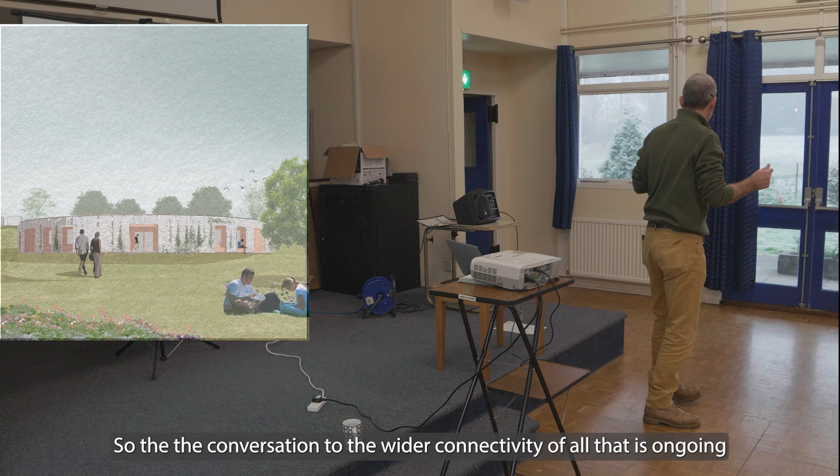First thing is, given the site that we've got, this design at the moment is only in the fenced area. So the conversation to the wider connectivity of all that is ongoing, and obviously some of your comments are going to help foster a good dialogue with that, with Dacorum. So in regards to access, in regards to where the car parks stop or start, where the servicing is, all those sorts of things, we're trying to get everything in the pot so that we can work out what the best solution is.

Okay, so the second thing is in terms of a brief, there's two briefs. One is a functional brief, as in what's required. Connected to that is how much is it going to cost and how's it going to work? That's a physical thing. The main thing, though, is there needs to be a social brief, because why are we doing this? It's a social centre, it's a community centre.

And what we're trying to do is make something that celebrates Tring, celebrates the best of Tring, now, in 50 years' time, and in 100 years' time. So we're leaving a legacy to people for 100 years' time. They'll say, this is how they did things, this is what they did, and this is what they gave us. And that's an important thing.

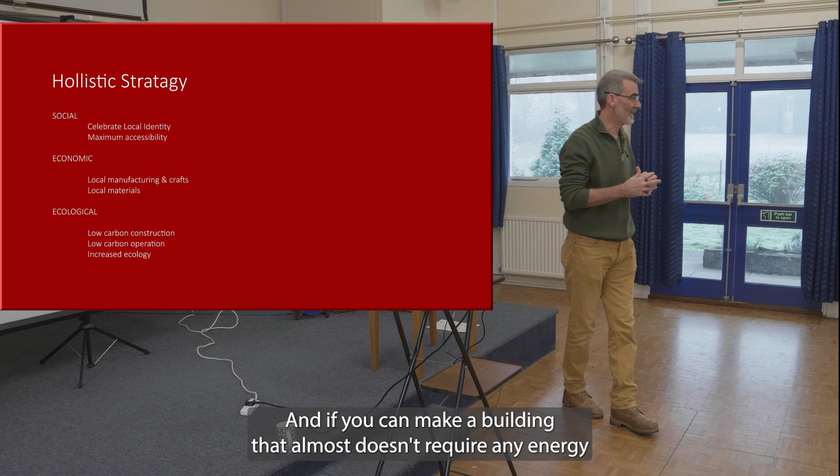When we build into this project the fact that we've got climate change, we've got oil prices, we've got all sorts of things, it's not going to get better, it's getting worse. So what we have to do is find a way of making the building future-proofed in terms of its operational energy requirements, fundamental. And if you can make a building that almost doesn't require any energy from the grid, that's a great legacy to leave people, because it means they can operate the building without being burdened with other costs and the risk of things closing down.

So secondly, social and community. It needs to be inclusive. It needs to be something for everybody. Symbolically, circles have no corners, so there's no inside, there's no outside. It's just a sort of corral for people to come in from all directions. That's just a symbolic thing. And many cultures throughout the world, when they do community things, it's a round thing.

Secondly, from a practical point of view, one level. I know a lot of you have been asking, why is it on two levels? And we have to ask the question, why would it be on two levels? What's the benefit of two levels? The downside of two levels, I mean, you'd have a more compact construction possibly, using the same foundations to do two floors, but you have to realize you're giving up a lot of net internal space.

Because in order to get access for everybody to the second floor, you need to have circulation space, you might need to have toilets, and you certainly need to have a lift and staircases. So you're taking the net area that could be used from the budget that we may be able to put into that, which is not something that's going to contribute to the functioning of the programs that you're going to be running.

And then the third thing is, if we're going to do something like this, this is at the heart of Tring Town, and it needs to be something that we're all proud of, celebrates the best of Tring. That means, is it possible to build with our local craftsmen? Is it possible to build with local materials? And is it possible to have something that shows how you can run a building with very little cost? And if that's all possible and it looks great and everyone's proud of it and it works very well, it's the sort of thing that other people in other towns might say, that's a good idea, maybe we could have one of those. Let's learn from that. So I think there's something there in terms of the legacy of that.

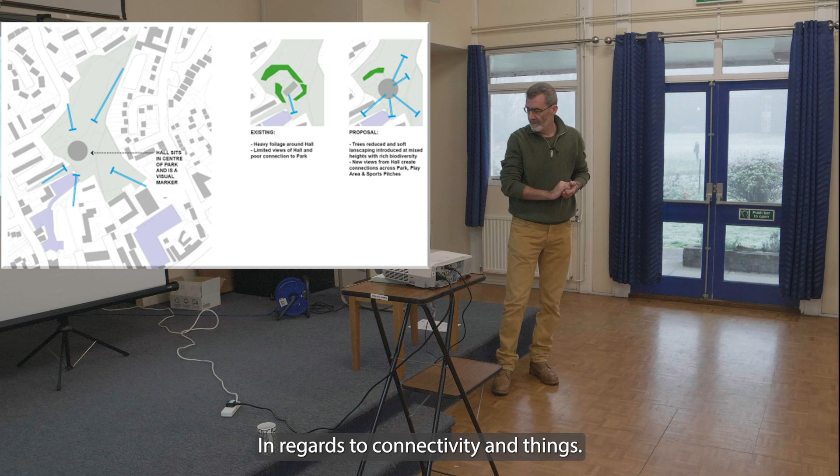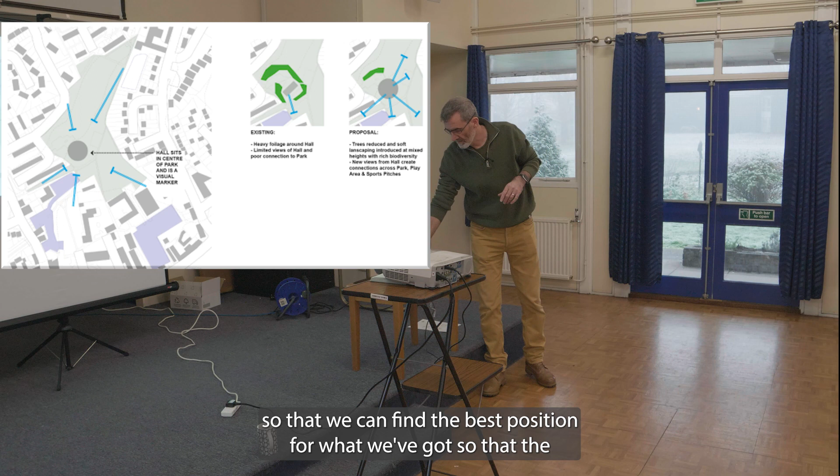In regards to connectivity, I'm not going to go too much into this, but you're all local, so you're aware how the whole thing works here. Basically there are various routes - primary routes, secondary routes, and nodes, where someone will hang around because there's something going on, a playground for instance. We need to analyze and map those out so we can find the best position for what we've got, so that the opportunity here can be a catalyst for the wider area, not just something on its site that doesn't pay attention further afield.

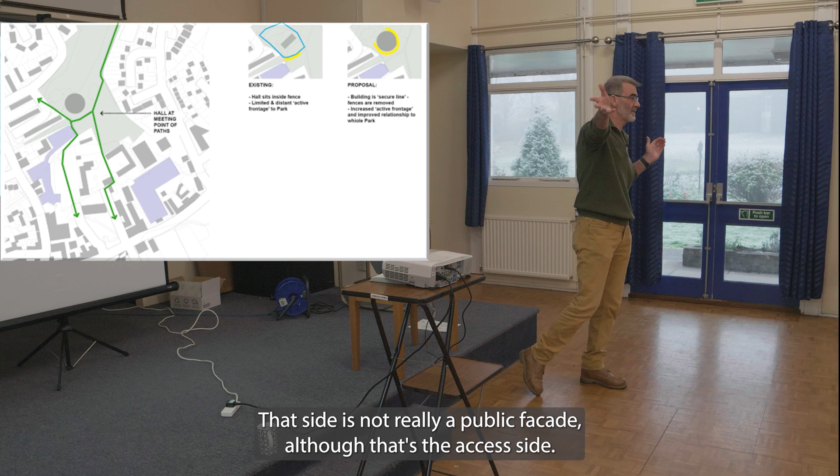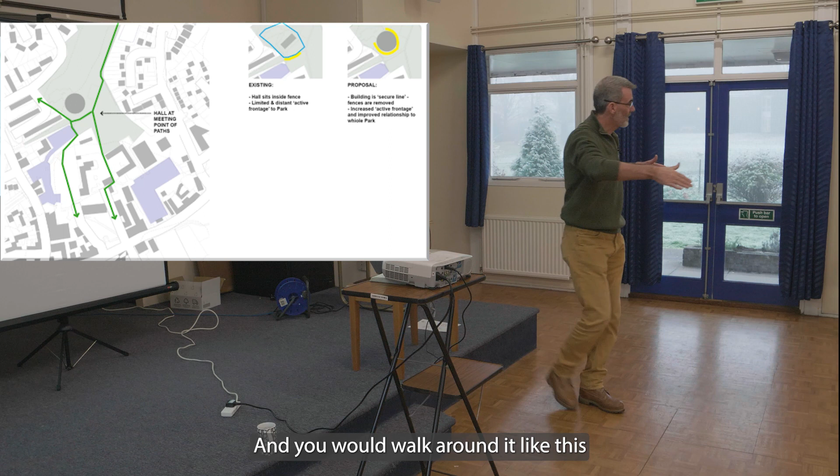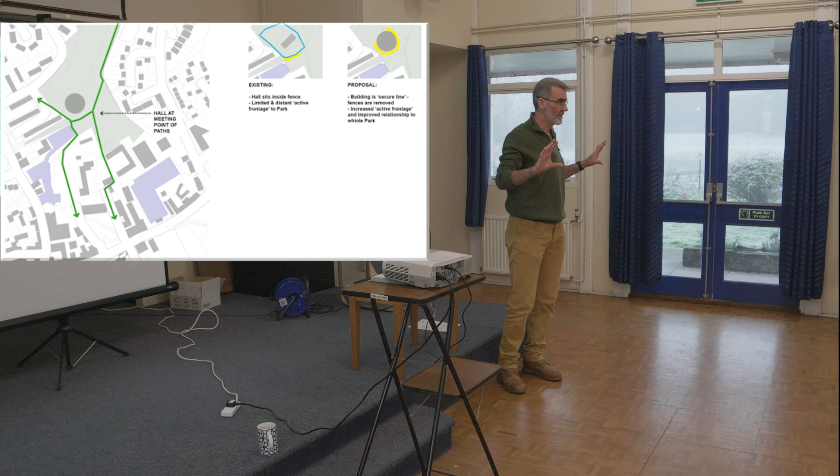At the moment, this whole building has a facade on this side. That side's not really a public facade, although it's the access side - great that we've got lots of light, but in terms of public identity, this is it, that's your shop window. By doing a curved circle that goes further out, the front of the building would probably be halfway between here and the fence, so it's much more in the park, and you'd walk around it as you pass through. So the public facade, the shop window of this space, is far more exposed, which should encourage people to use it - it would have its own identity.

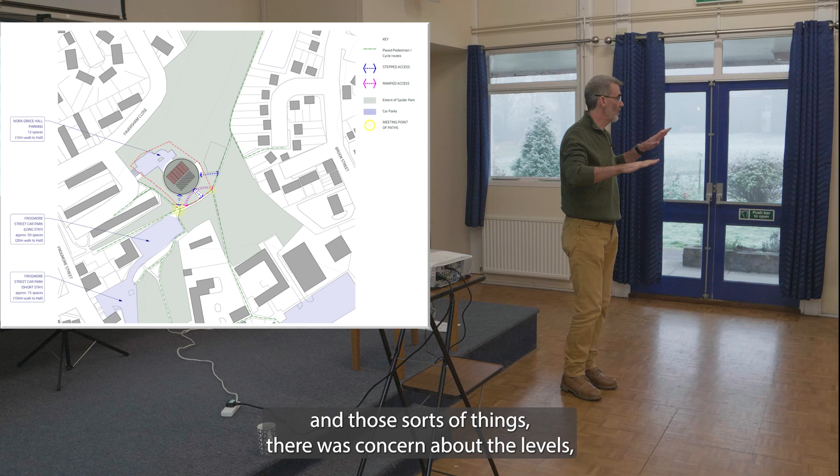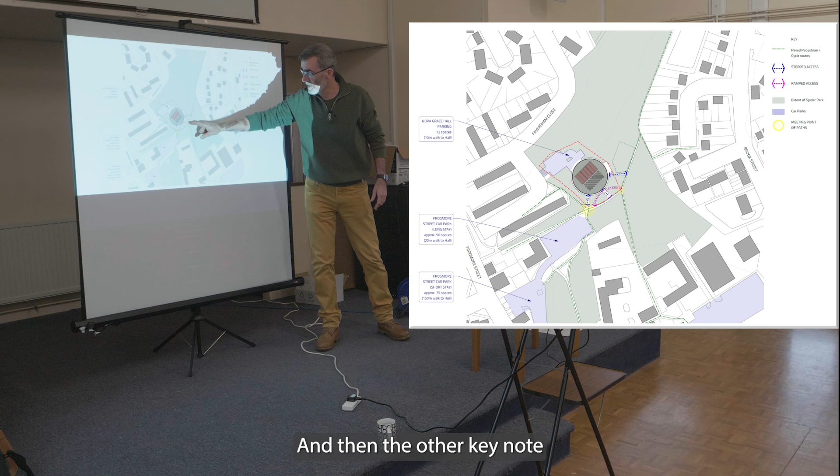In regards to circulation, I won't dwell on this too much, but just to clarify from the last consultation, in terms of access for partially abled people or pushchairs, there was concern about the levels. Actually, you can see - I'll go up here - the key nodes are on the corner of the park, unless the parking changes, and the other key node is where you get the connectivity. The front of the building is facing that way, oriented this way.

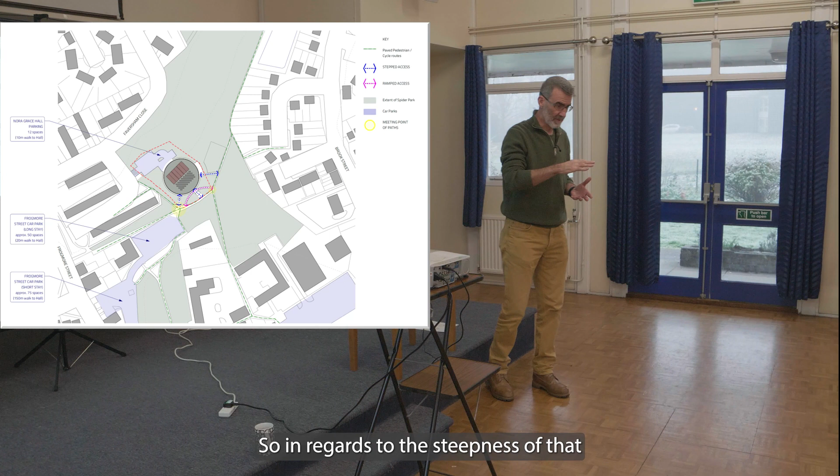But it's probably not the route most people will access the front door through, because you'd be coming from there or there. So you'd gradually climb up the ramped area, which goes either side - a gentle ramp that gets you to the front door and back down. So regarding the steepness and accessibility, it's a balance between that level and where's the best place to put the floor level.

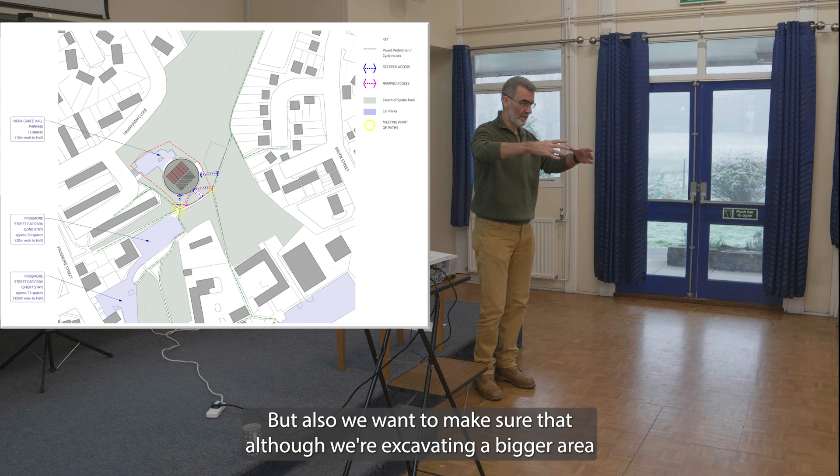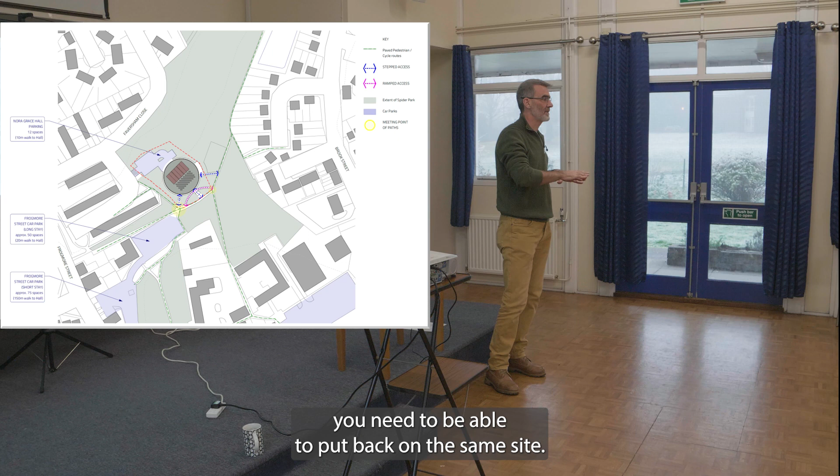At the moment, the balance is that the floor level we've designed is slightly higher than this, to try and reduce the slopes, to make sure we can still have access. We also want to make sure that although we're excavating a bigger area than the footprint, we need a balanced cut and fill - whatever you're cutting from the ground, you need to put back on the same site. What we don't want is lots of lorries going away with all sorts of muck.

So we talked about that before. Just basic community is we're all together. There's no hierarchy in terms of its formal position.

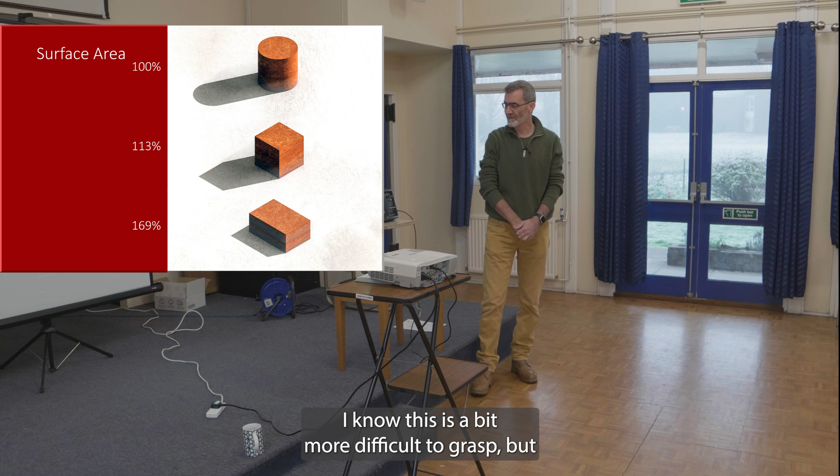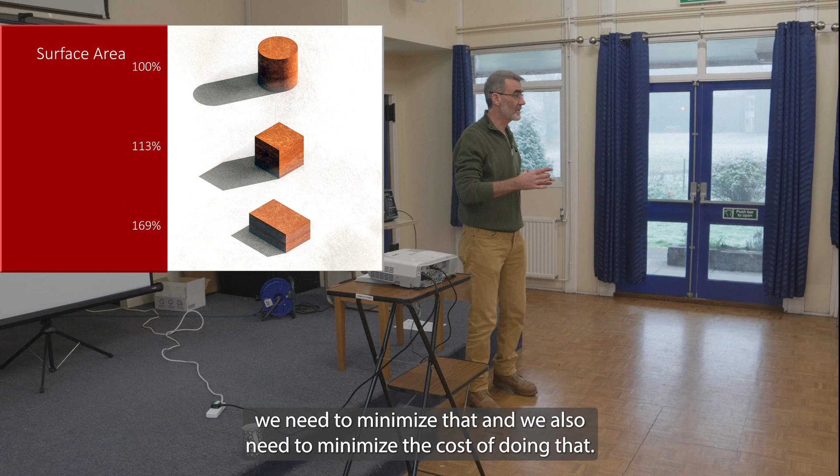So we'll come on to this now. I know this is a bit more difficult to grasp, and I know there's engineers in the audience here, maybe you can explain the maths to some other people as well to help them. But basically, given that the brief is to make a low carbon building, in terms of the amount of carbon that's used to construct the building, but also in terms of the carbon used to run the building for the next, say, 100 years, we need to minimize that. And we also need to minimize the cost of doing that. Is it possible to do all of that at the same time as having a building that celebrates and is something that we can get excited about? That's the balance we have to have.

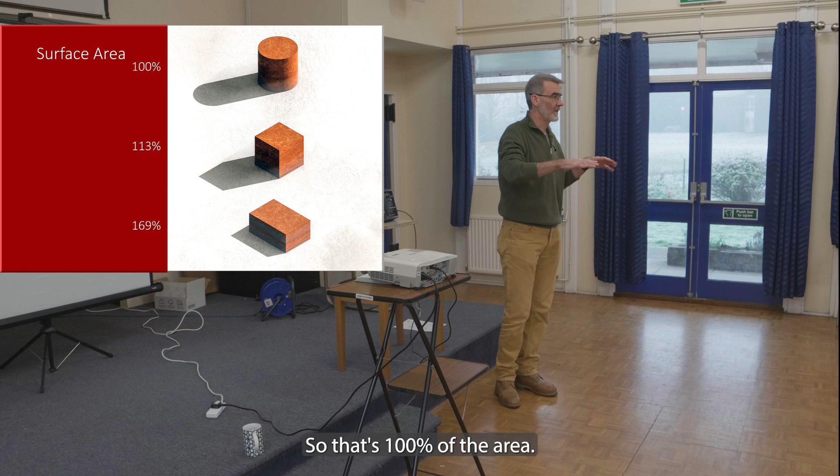So if we take an area, let's just say we have 100 square feet and we have to make a building, and we're going to make that building round. So that's 100% of the area. Now, if we make it square, the external surface area of the same floor area is now 13% more. That's not too bad. But if we make it rectangular, which most buildings are, this building is, lots of buildings are rectangular - everyone feels they want a rectangular building because they can have views both sides, easy access both sides, lights, all those sorts of things - we've gone up to 69% more.

So if we just look at that as an economic issue, and there's going to be a limit on the amount of money that can be raised, the budget and what's being paid for, wouldn't it be better to put that 69% into something else that's useful for the community inside the building?

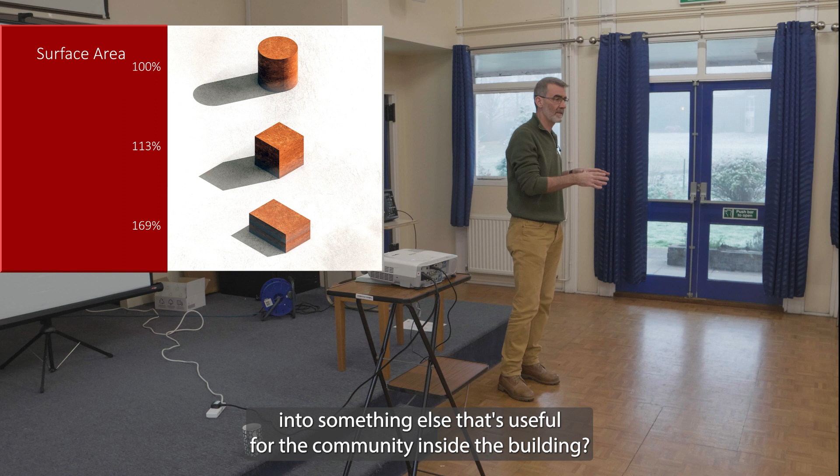Can I ask a question? I can see the advantages of a round building from the external building. But for storage and space usage within, it limits it.

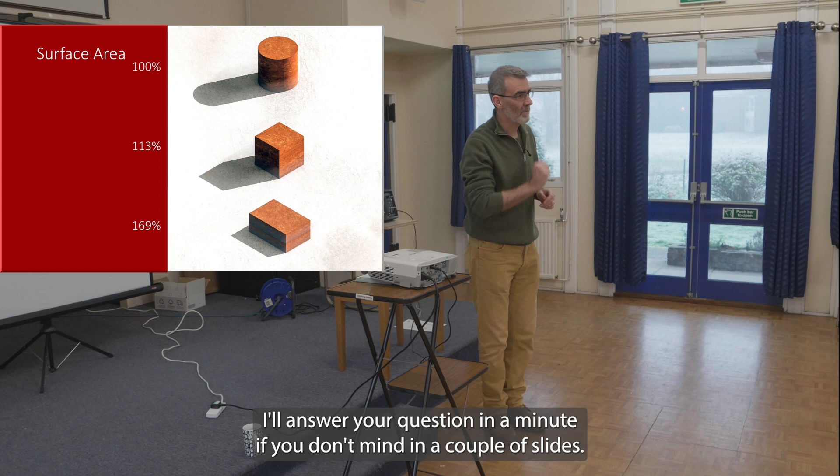I'll answer your question in a minute, if you don't mind, in a couple of slides.

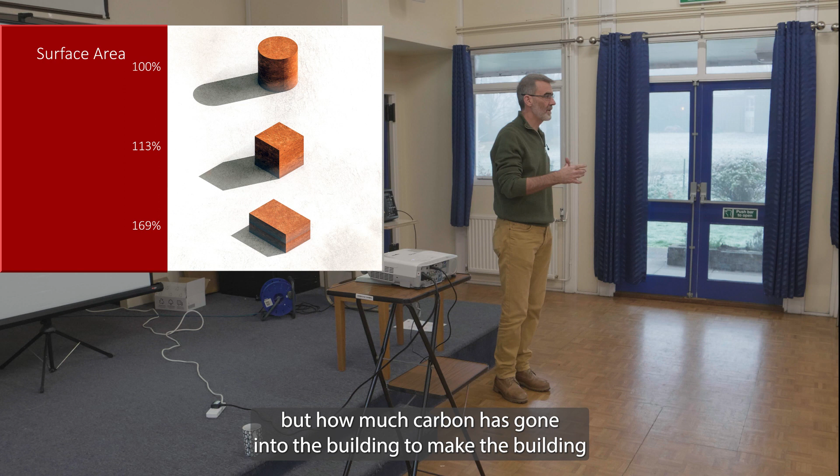Secondly, it's about the construction, in terms of not just the cost of the wall, but how much carbon has gone into the building to make the building. And if it could be 69% less, that's a good thing.

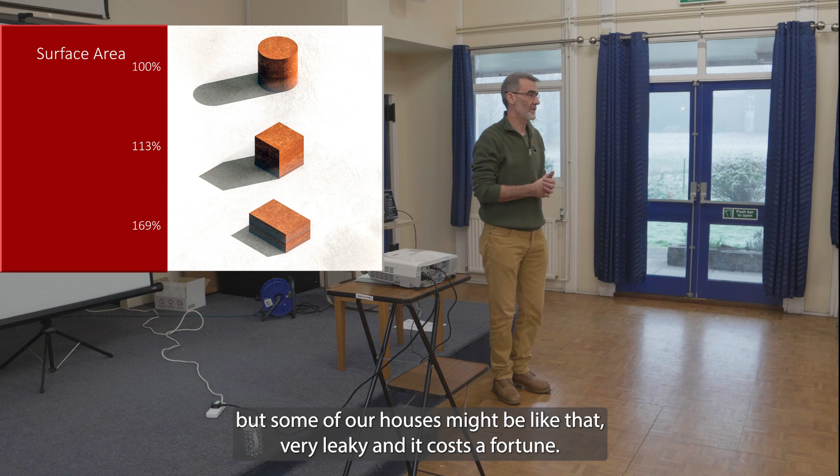And thirdly, the last one is through the external fabric of the building, that's where you get your heat loss. You all know about that. I mean, this building's appalling, I'm afraid, and I don't know what the running cost of it is, but some of our houses might be like that, very leaky and cost a fortune. So if our energy bills in our average homes have gone up to 3,000, 4,000, that's an awful lot.

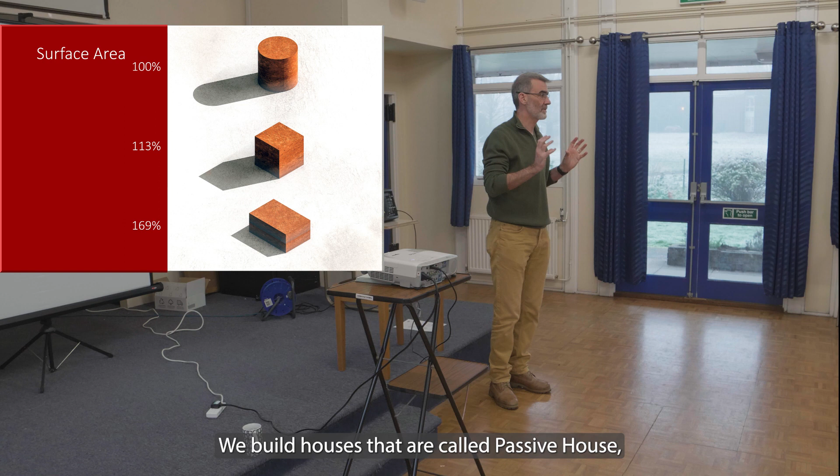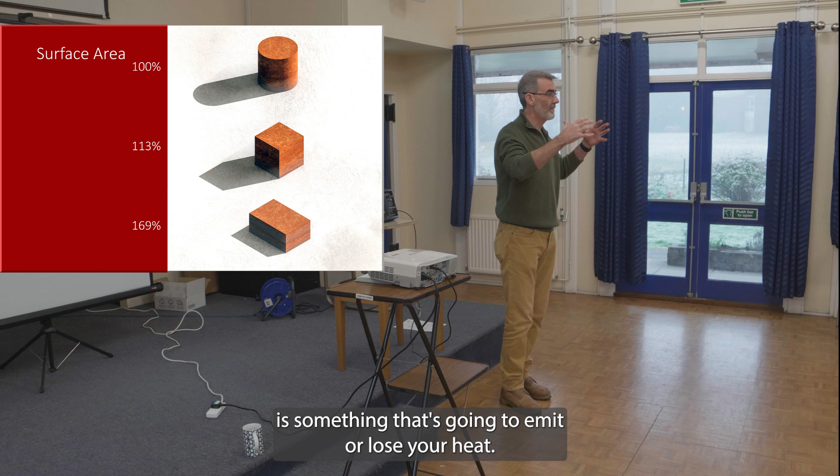Now, some of you may not know about them, but there's a thing called passive house. We build houses that are called passive house, and they are high standards of energy efficiency. If I build a 3-bedroom passive house down the road, your energy bills would be about £300 or £400, and that's a good thing, right? So we want this building to reflect that type of thing as well. So the surface area of the building is something that's going to emit or lose your heat.

And that means that if we can reduce that by 69%, that is a good thing as well. So we'll come back onto the question in a minute in terms of storage.

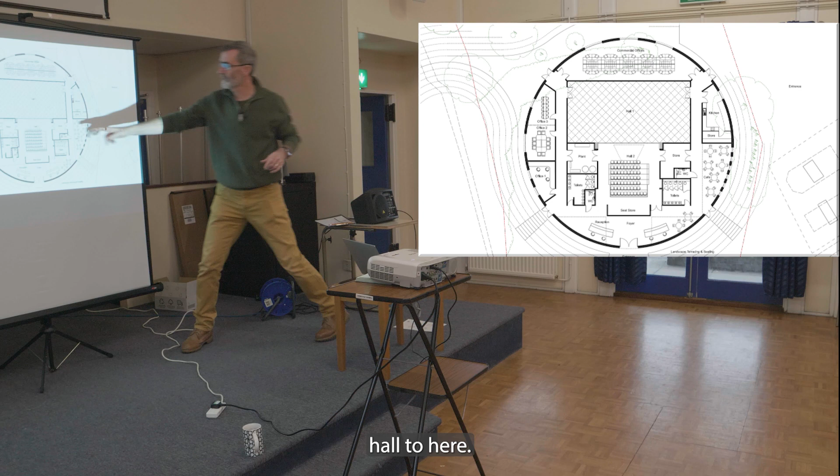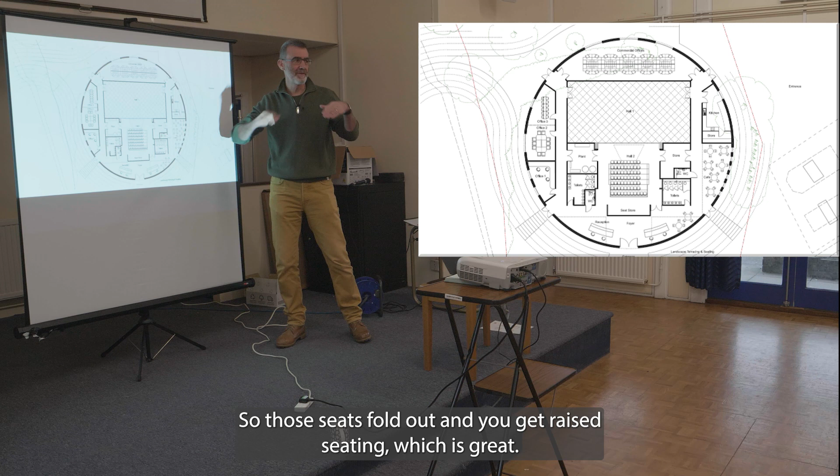So the layout at the moment is Hall 2 here. For the brief, we wanted to take these seats and make a cinema, so there could be a film club for those seats. I think there's about 75 to 80 seats. Those seats fold out and you get raked seating, which is great, and they've just been bought, so we want to make use of those.

So they're stored in here. When they're stored away, this hall functions as any other hall like this in the usual way, with whatever multifunctions go along with that. Now this hall doesn't have any light, specifically because of the kinds of functions you might want to run in those spaces.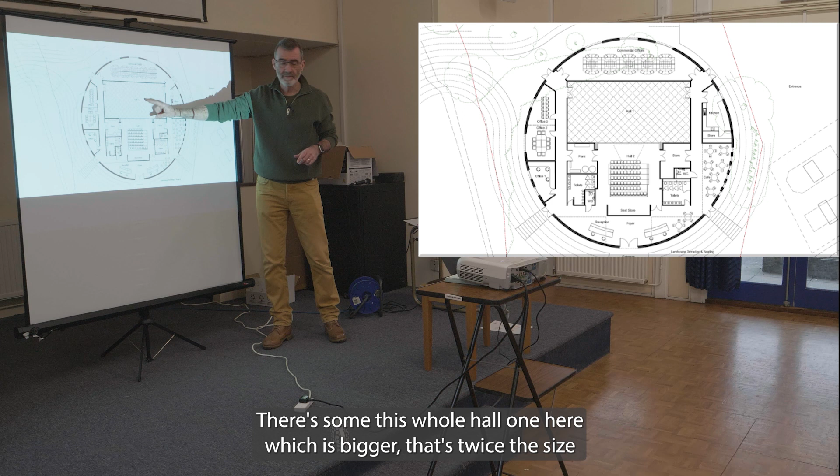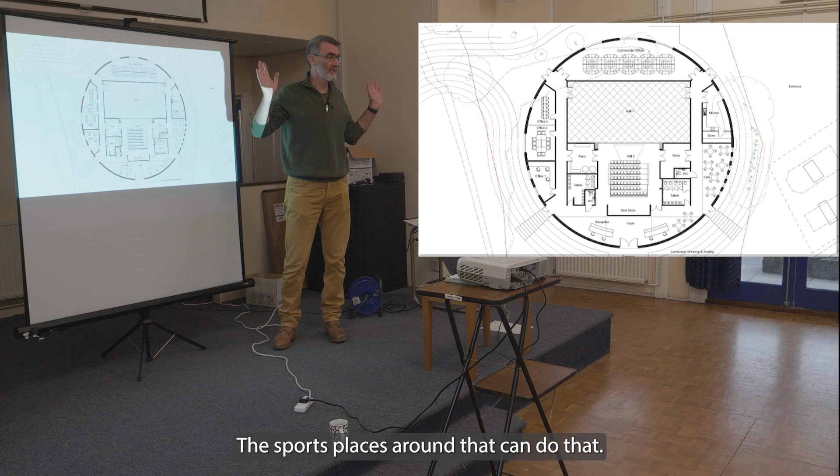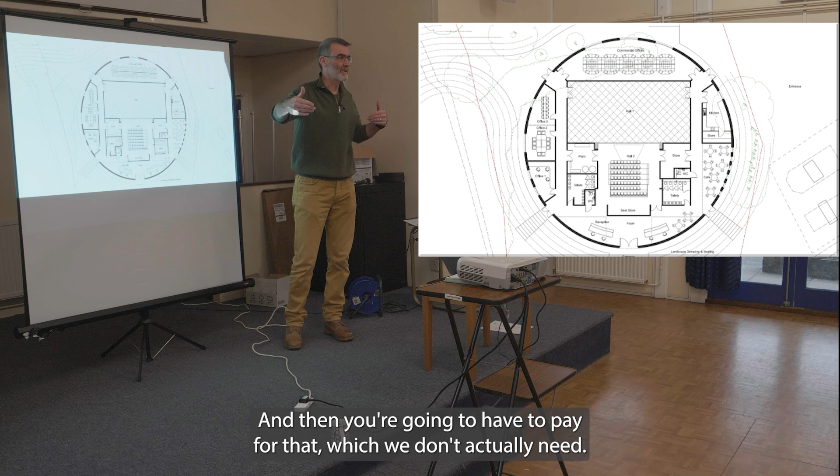There's Hall 1 here, which is bigger, twice the size, and that's a more flexible hall, higher, because you can get more things going on. This is not a hall for sports - there's sports places around that can do that. The trouble is sports like badminton have very specific requirements for volumes, heights and distances, and you'd have to pay for that, which we don't actually need. But it's versatile enough to do an awful lot of things.

And this hall is completely daylit. The little pitch roofs you see on the building all have windows, so there's an awful lot of light coming in on both sides. They can be blacked out as well, so if we need them dark, that can be done. If you want light in this room, you can open up these folding doors and you'll get a lot of light coming in through here too.

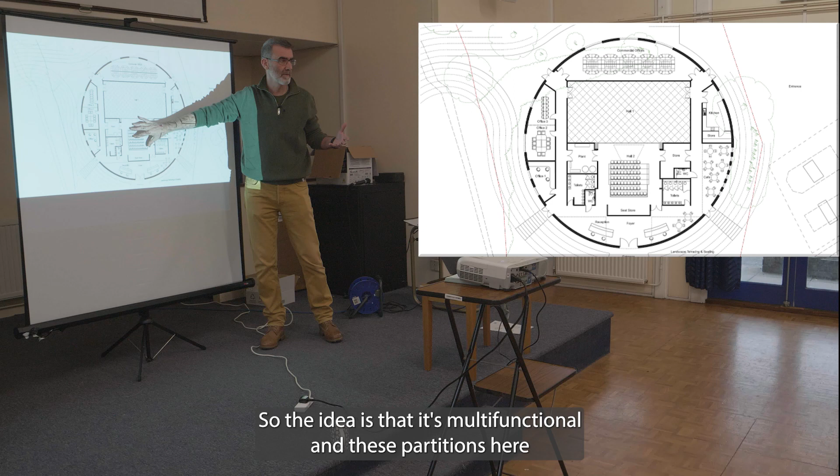So the idea is that it's multifunctional, and these partitions here are acoustic buffers as well, so you could have two functions going on at the same time. Now I'm not suggesting...

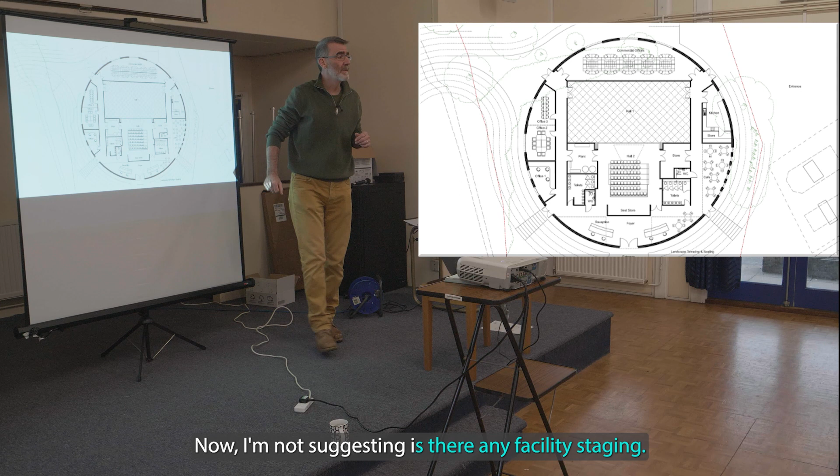Is there any facility for staging? Temporary staging - yeah, so just coming to that. Basically, with the acoustic buffer here, most functions that go on are probably going to work. But if you've got a disco going on here and you're trying to have a cinema here, no, that's not going to work. At that point, you start getting in a management system to make sure you're not programming things that aren't conducive to the way the building works.

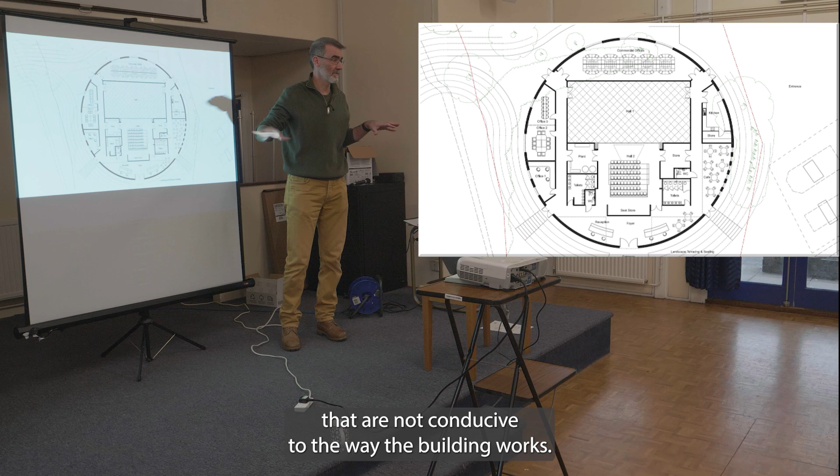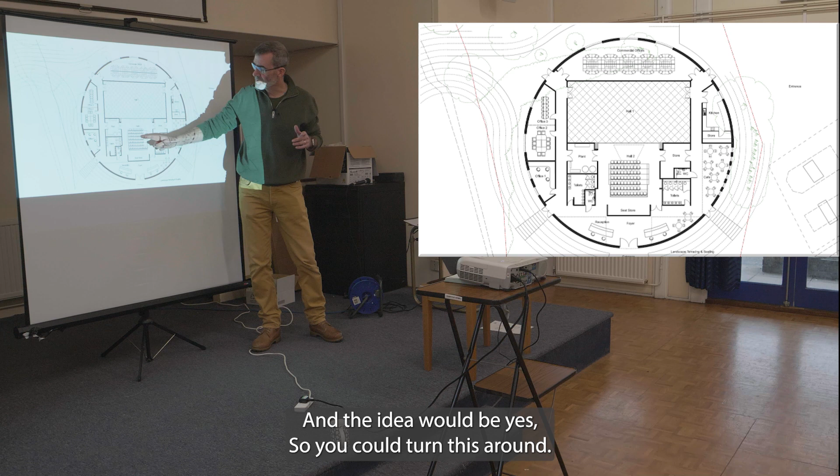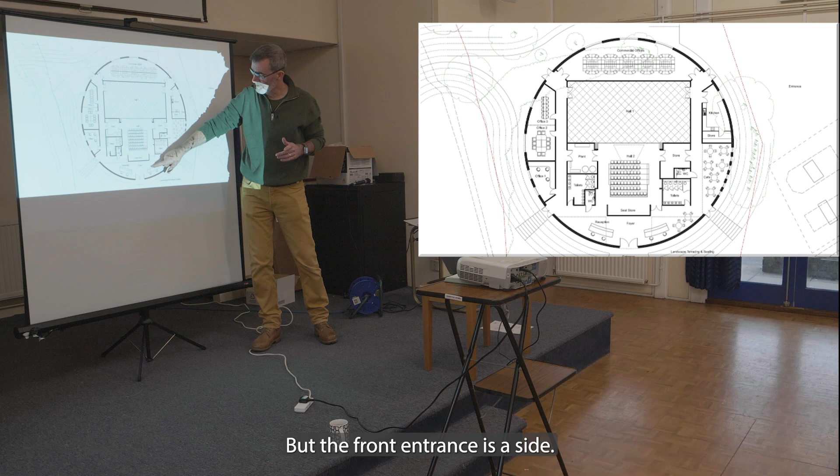So with this being around 80 seats, is it possible to say occasionally have a 200-seat performance? The idea would be yes - you could turn this around. Either you use this as rake seating and move this forward a bit, getting sight lines that go like that, with the stage here. Or you could reverse it and go this way, but the front entrance is on this side, so there are some things to think about how that best works.

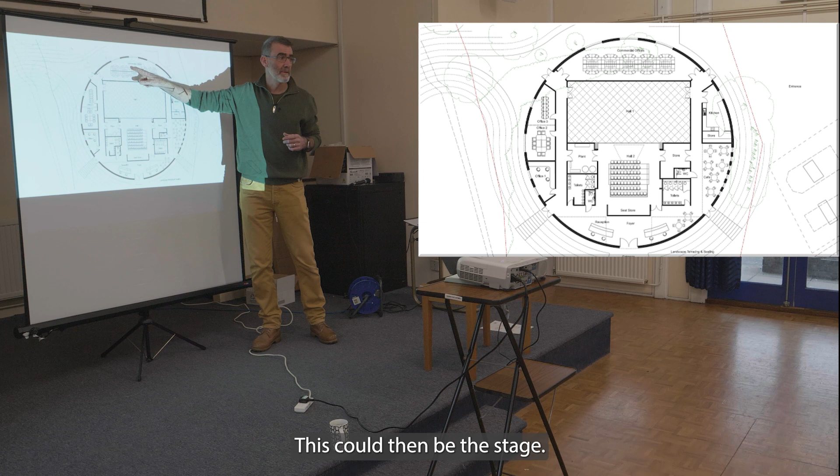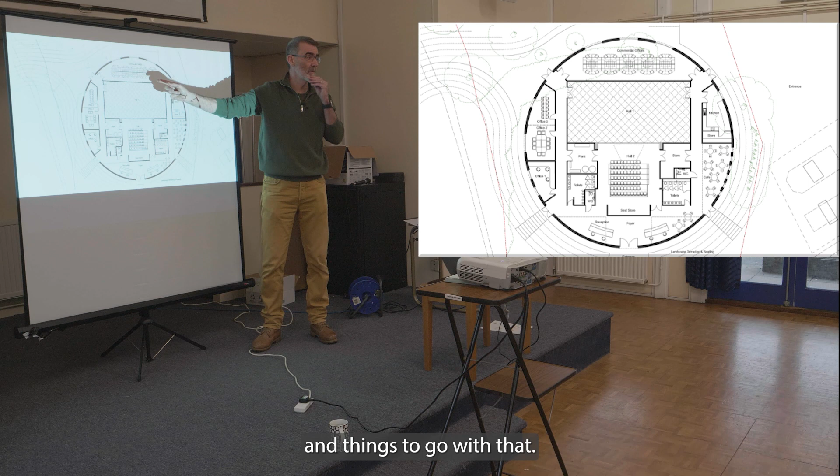Given the back here is for servicing - this is a slightly outdated plan, but each of these has its own door so we can get access in. We just thought of an idea: we could have similar screens here along here, so they could open up these partitions. This could then be the stage, and we can access stage sets, sound equipment, and all sorts of things from the back. You'd get a back of house, with a couple of green rooms and things to go with that. So there's all sorts of things that could be configured to balance how these spaces work.

So those are the main halls. Then we get toilets for that number of people - that's how many toilets you need. Plus we need storage, plus we need plant rooms and stuff like that. So that's the main building there to function. Now, in order to make that work, you have to have your fire escapes.

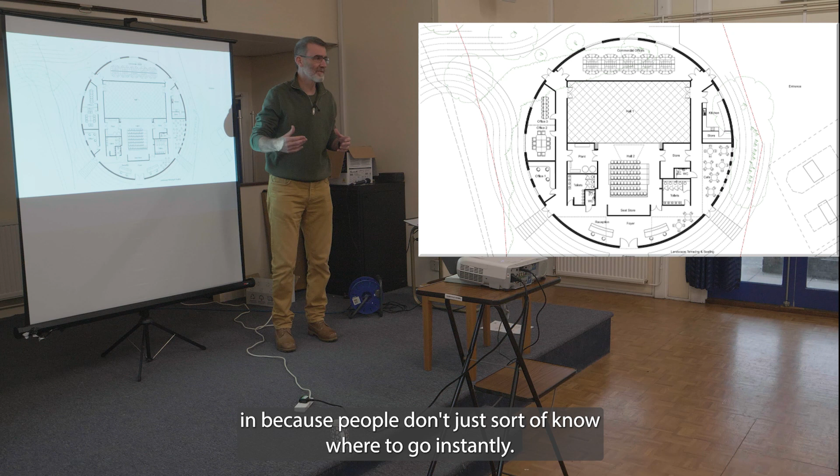You have to have access corridors for that many people, and you need to hold people before they go in, because people don't instantly know where to go. They're milling around, a bit lost. When everyone backs up like that, it's an issue. So you need net area to handle that.

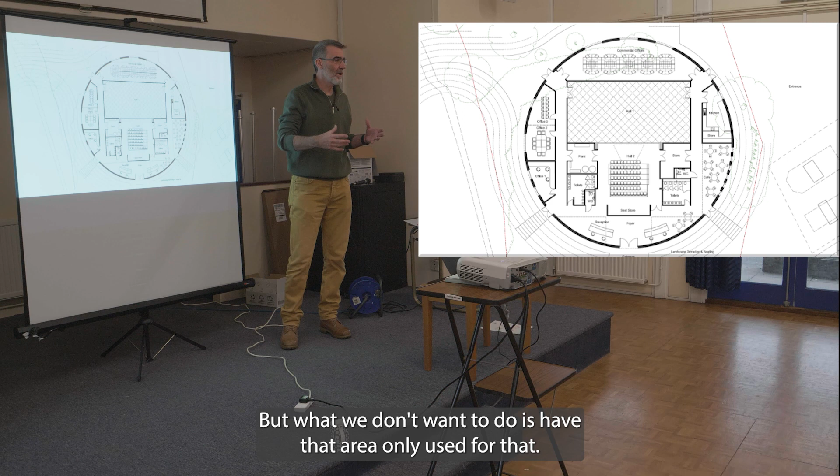But we don't want that net area only used for that purpose. It just doesn't make sense. It should be multiple use.

So we can have spill-out space here where we have the cafe. And the cafe is where the heart of the building is. It's the life of the building.

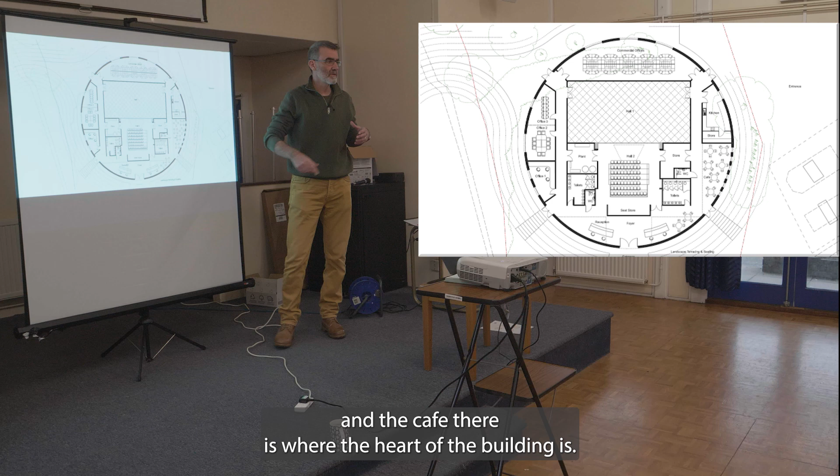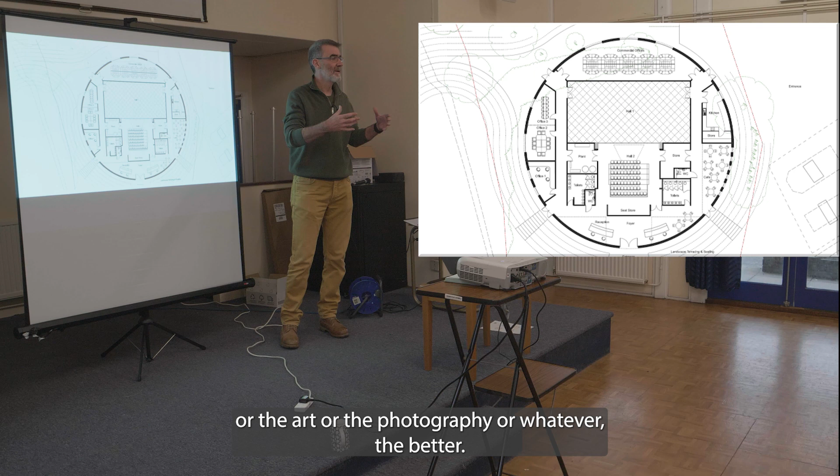When you have a particular performance, you can clear away stuff and make more space available for circulation. The walls of those spaces really should be used for exhibitions and things like that. Ideally exhibitions should be where people are going to be, so more people get exposed to the paintings, art, or photography - the better. We're making more use of those spaces as well.

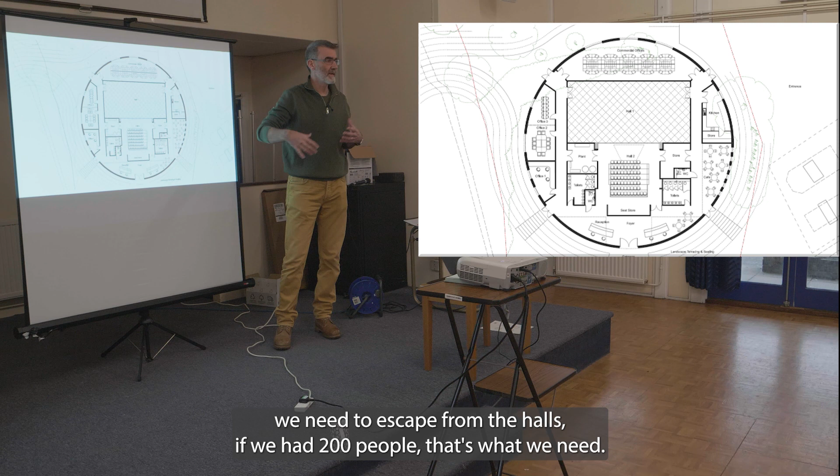You can see the corridors, technically, and the amount of space we need to escape from the halls - if we had 200 people, that's what we need. So we've got to make the area bigger.

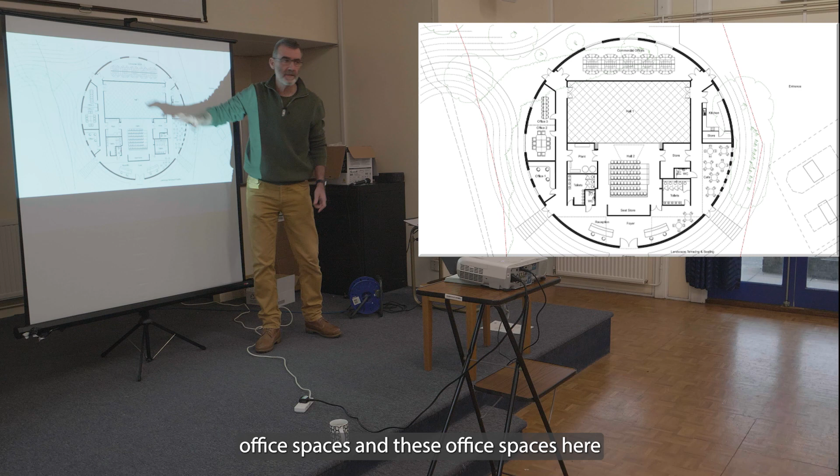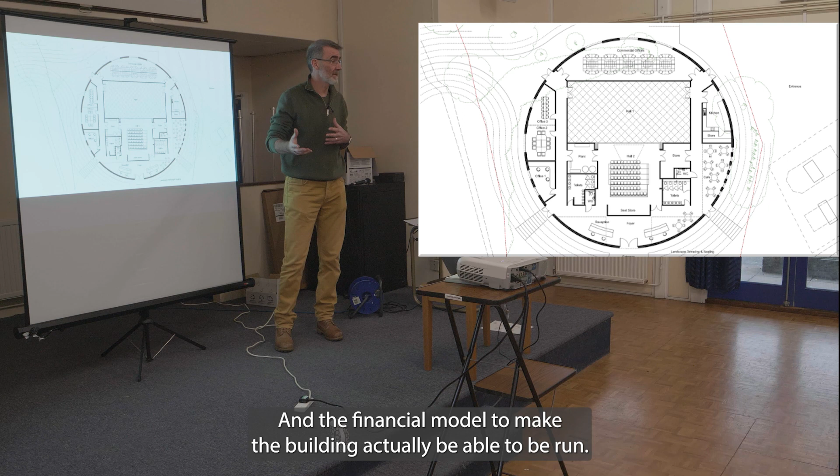Around the side you get these secondary office spaces, which are configurable to either be part of the hall - private, for management - or open to the public. The balance of how much is used for the public is about operating costs and the financial model to make the building actually able to run. That's a question to be navigated later.

So did I answer your question on stage set?

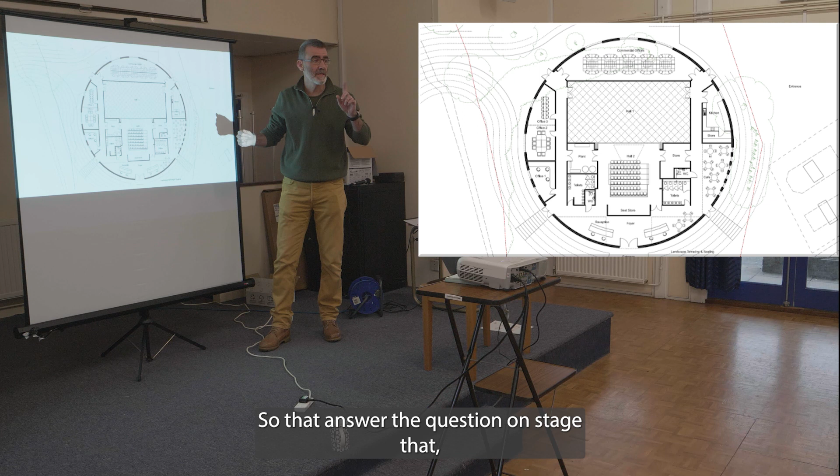Now, in terms of access, you can see we have fire accesses here, here, here, here, and also here. So that's where they need to be.

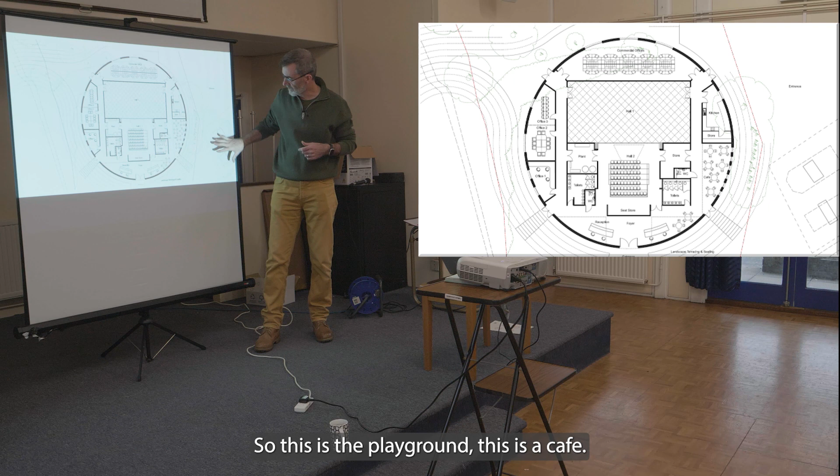It makes sense to make a fire access also an access point, since you've doubled it up. Depending on where you are - this is the playground, this is the cafe - it makes sense to use this just as a door.

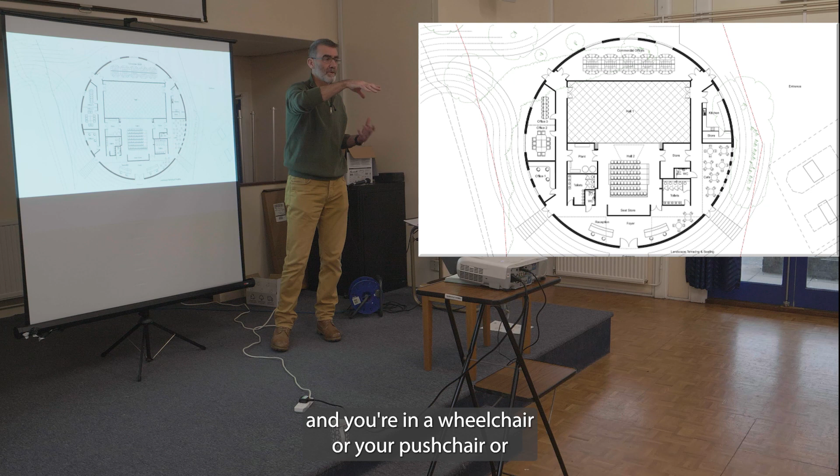Likewise on this side, if you're coming from the car park and up the ramp in a wheelchair or a pushchair, it makes sense to come through there. So there are multiple points, as well as through the back here for more private use of those spaces.

So that's the connectivity. Don't need to go on about that anymore.

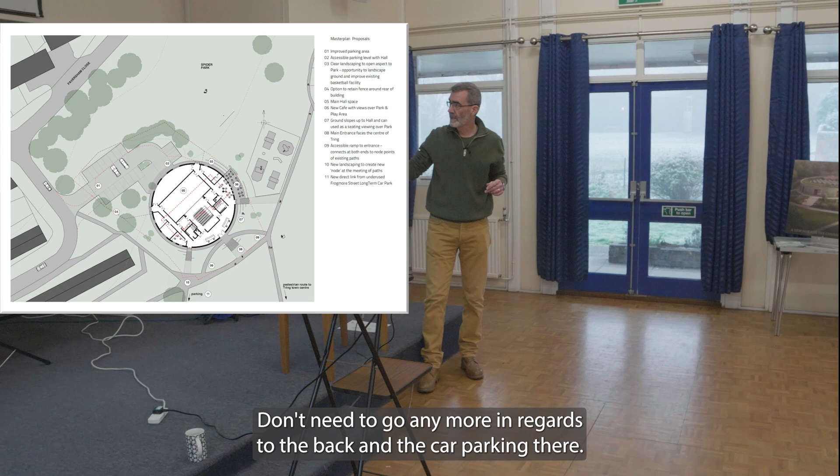Regarding the back and the car parking there, the slope is shallower than that because we moved the building up a bit, but that's something that needs to be worked through. At the moment you've got three or four disabled spaces right at the back, so you can actually get to the threshold of the building.

That's something to be worked out because we don't really want cars coming up the front of the building - you'll just get cars in front of that and it'll block everything else. That path from each of those nodes is just a gentle ramp.

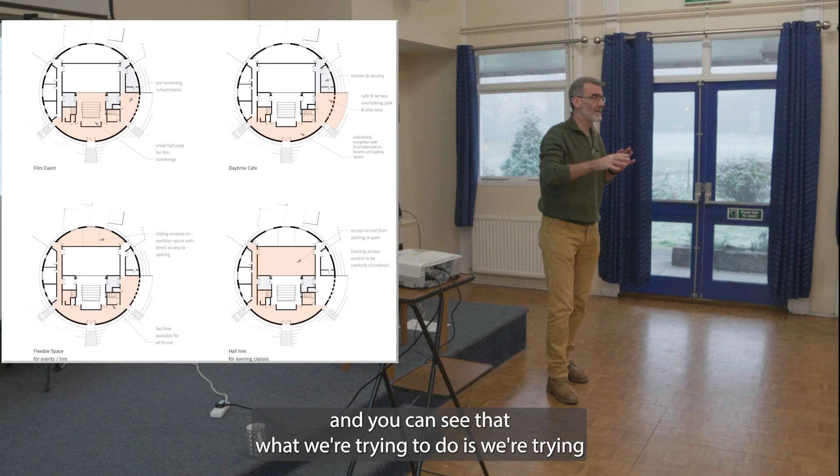I'm not going to go into this, but you can look at the diagrams there - we're trying to analyze and anticipate different types of programs, different types of use, and work out how the building would be configured to do that.

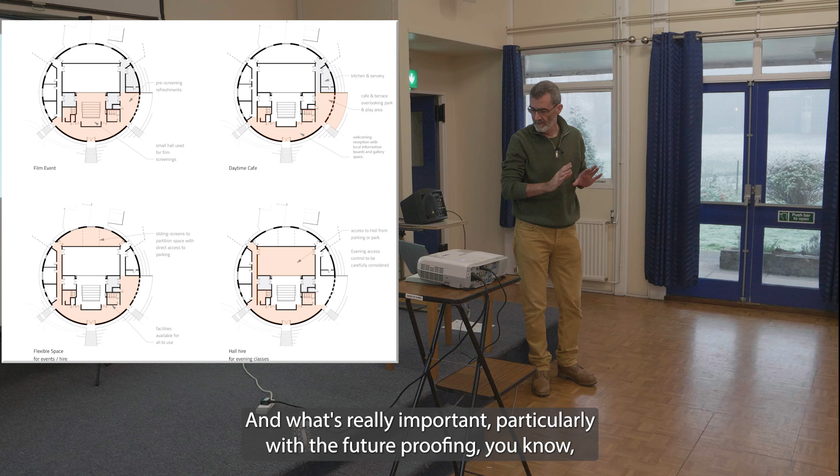What's really important, particularly with future-proofing - 50, 100 years time - is to make it adaptable and as flexible as possible for things we can't even think about now. Who knows what people will be doing in 50 years. But this shows how there are multiple uses for each type of space, particularly the circulation space, so we can get value from that.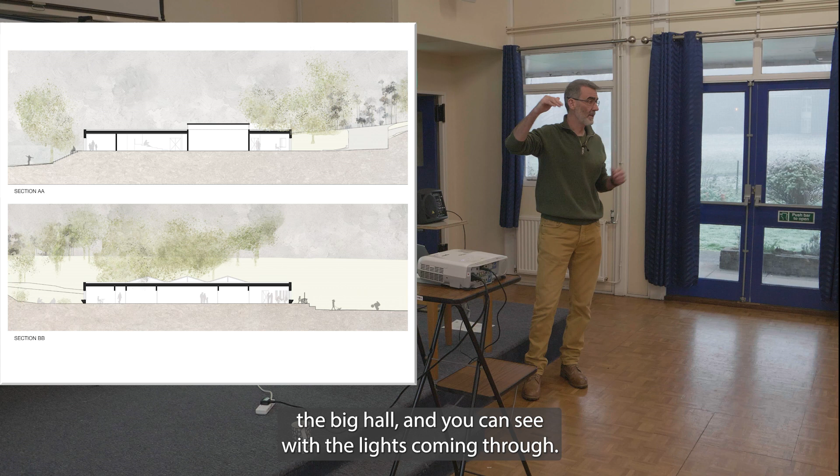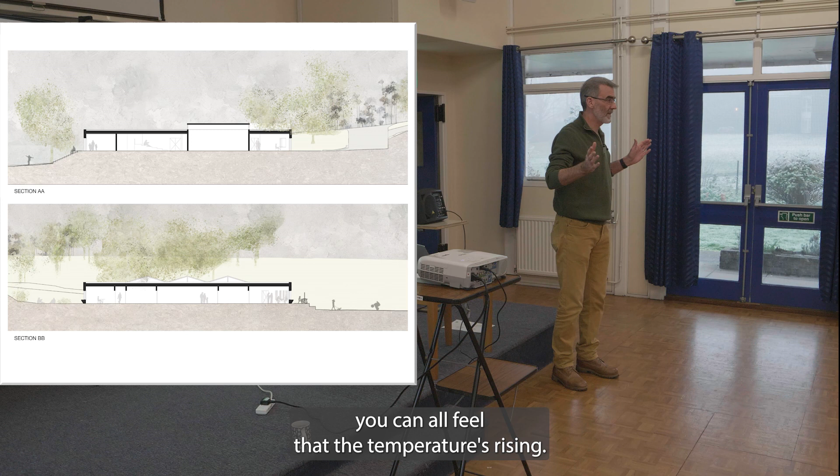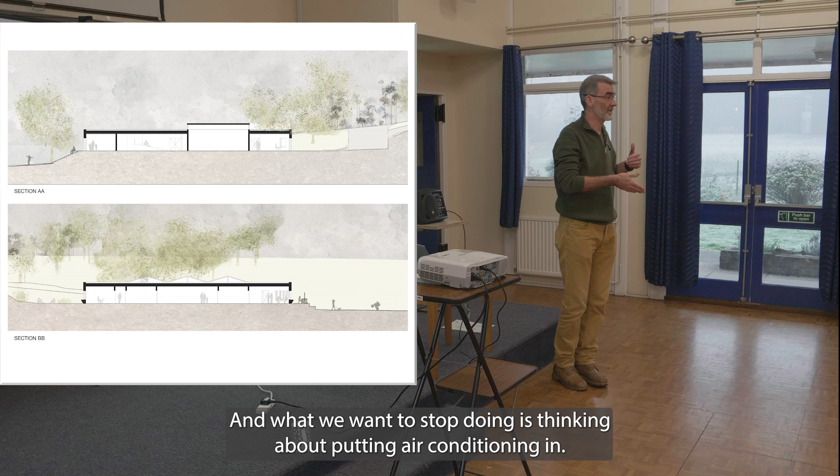We've got to be careful - we want lots of light, which is nice, and this is nice here because you've got an overhang. But what you don't want to do nowadays, you can all feel the temperature's rising, our houses are getting hotter. When we do lots of glass like that, we're in danger of overheating, and that can be a real big issue. What we want to stop doing is thinking about putting air conditioning in. So we're not putting roof lights in horizontally because you're going to get more heat penetration - we're trying to do it on the side, and we can have a bit of an overhang like this so we can mitigate that.

In regards to construction, at the moment these things have to be worked through, much more detail later, in terms of value, cost, longevity, operational, all those sorts of things. But for the time being, based on what we use on our day-to-day projects, wood is really good because it's sustainable and carbon positive - you've locked up carbon in the wood. It's a great material: very warm, dense, good acoustically, all sorts of things.

So this is a product called LVL or CLT wood, which is like a sheet of plywood, probably the size of this room, or half the size of this room, and then you can cut that into any shape you want. It's quite efficient, and it can come off-site - manufactured off-site, and you come and bolt it together. Because the downtime, as we were talking earlier, if construction is going to be between 12 and 18 months, that's 12 or 18 months where this building's not being used. So can we shorten that? Sometimes building off-site, manufactured, and just bringing it and putting it together very quickly is the way to do that. So that's an option.

And then on the outside, the building needs to be insulated. So what are the best ways of doing that in terms of a low carbon way? One of the things we use at the moment is hempcrete, which is a blend of lime and straw and various other things, which provides a really good insulation level, but also quite resilient in terms of structural stability. And that's sprayed on.

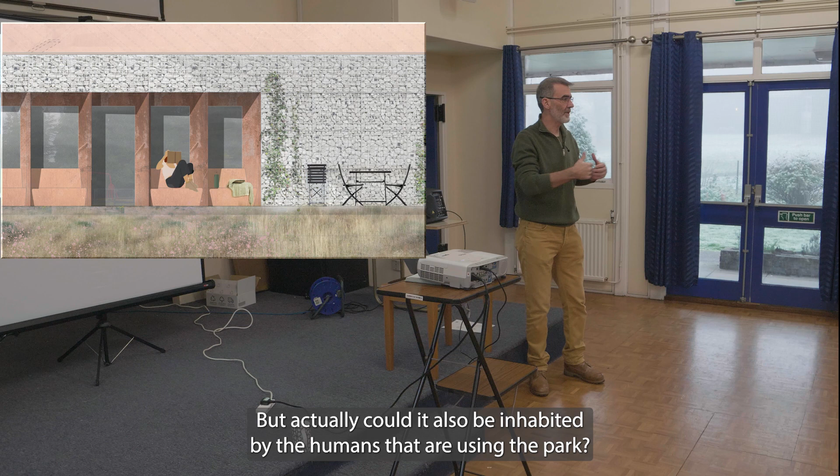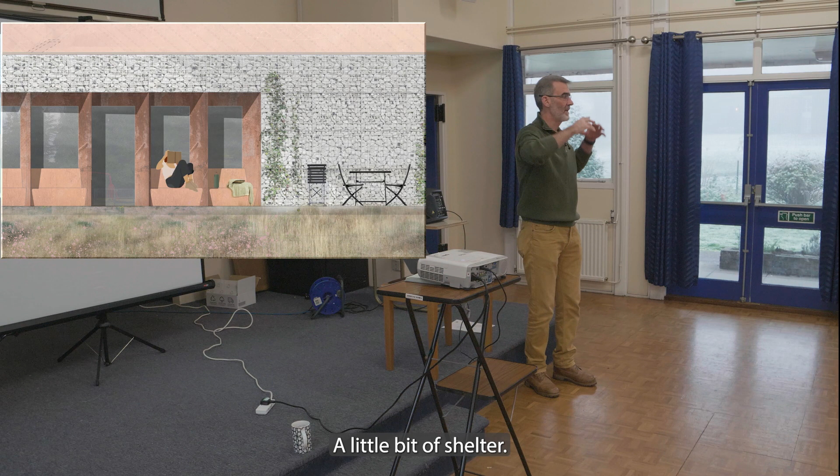And it'd be nice to have the park benches robustly built in, if you look at those drawings, so that they're safe and they're not going to get destroyed. A little bit of shelter, and that means parents can watch their kids playing around and feel they're sitting in a park bench to enjoy the rest of the park. And that's really what it may look like.

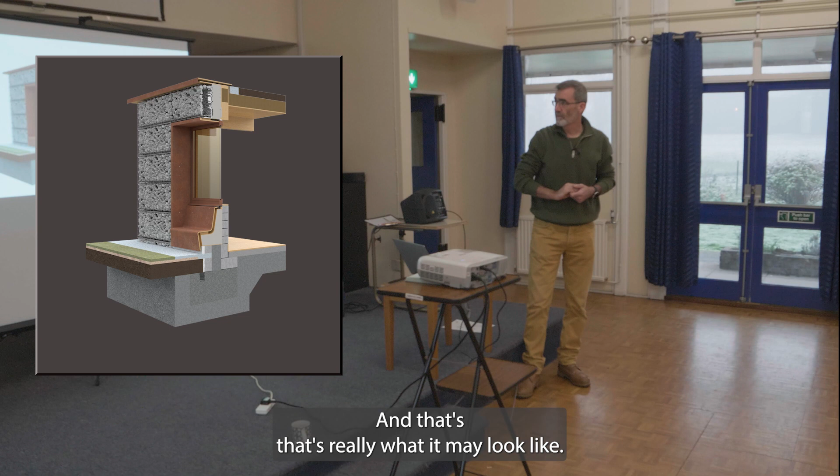So the external walls are gabions. Gabions are wired baskets that you can put things in. You can put all sorts of things in, bricks, whatever. It's a very cheap way of building a wall. A lot of gardens have them nowadays.

What we couldn't do, given that we want to choose, we're not going to go for Matthew's handmade bricks. It would be great too, because it's a celebration of what we've got locally, but it's very expensive. Plus we've got the carbon. But the other thing he does have, and lots of other people have on the farms here, is flint.

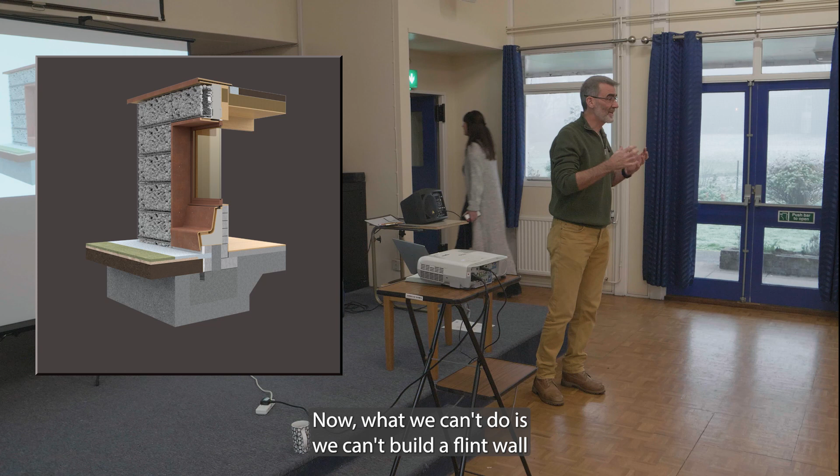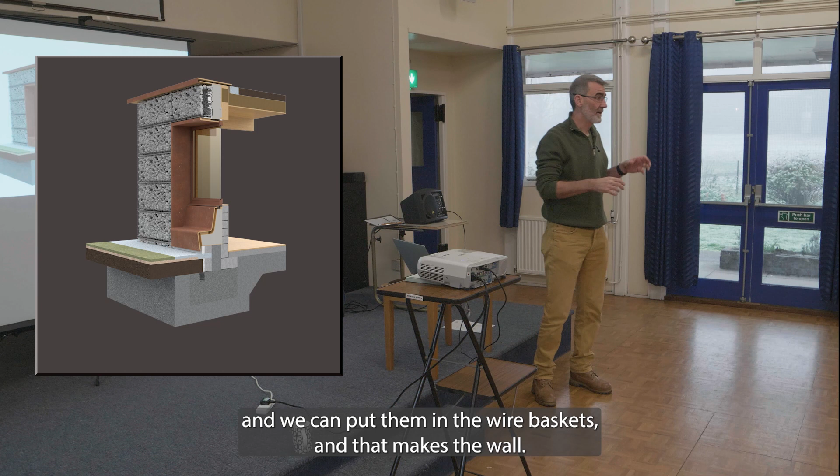Now what we can't do is build a flint wall, because flint walls are extremely expensive and they take a lot of maintenance because it's lime. So every 50 years you've kind of got to redo it or it falls apart. But what we can do is take the flint and put it in the wire baskets, and that makes the wall.

And if you look at some of the garden designs on TV and stuff like that, you'll see that kind of thing. I mean, they really work quite well.

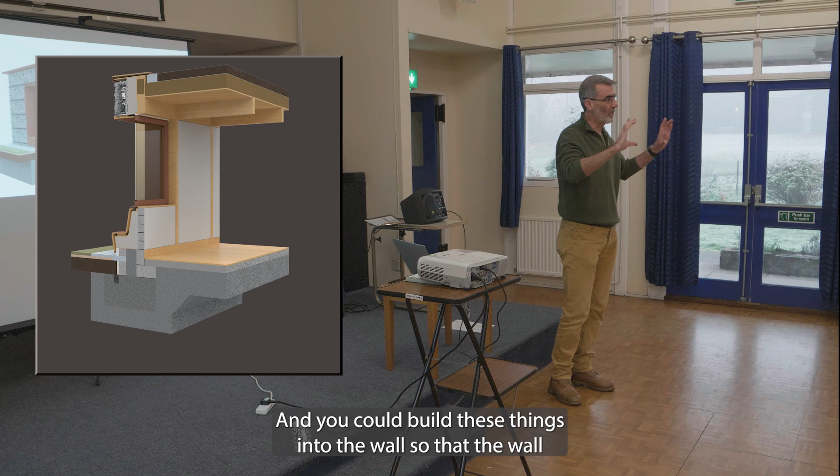And then we can inhabit it with things. You could have bird boxes, you could have little places for plants, all sorts of things. So there's a bit of life in the thing. You could even have things where the community comes and brings a memory piece in steel or metal, a spade or a tool or something, and you could build these things into the wall so that the wall has a memory of the community as part of an art piece. There's lots and lots of things we can do.

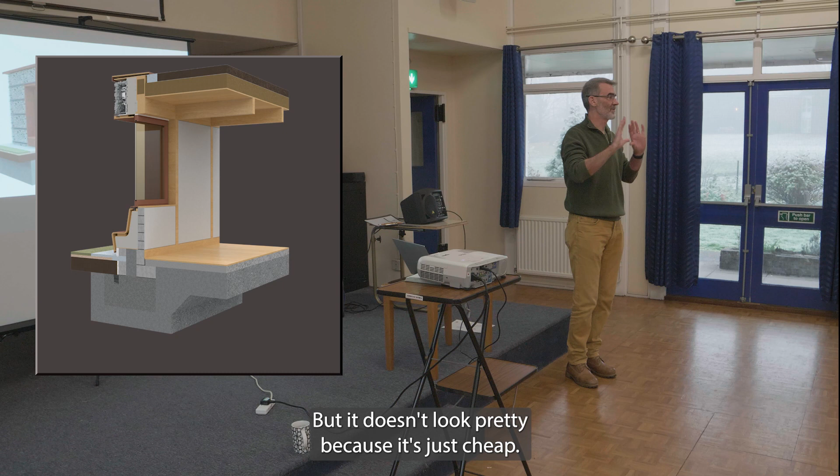But the point is, for some who may be concerned, that is not the envelope of the building. That's just what it looks like. The actual waterproof, robust, airtight, watertight membrane is behind that. But it doesn't look pretty because it's just cheap. And then we put these things on the front and then no one can see them. So you see the back.

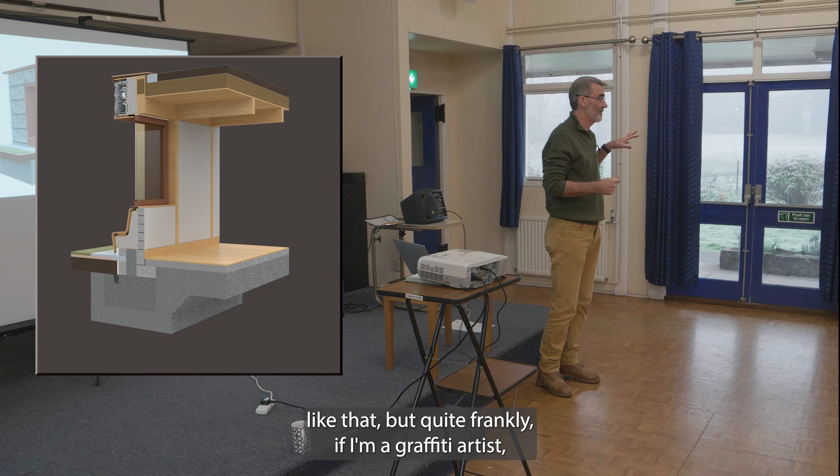And also, I know there's concerns about graffiti and stuff like that, but quite frankly, if I'm a graffiti artist, I want something nice, plain and simple to get my message across. The last thing I want to do is put it on a bunch of rocks. It's just not going to work for me. So I think if we did a brick wall like that, you're going to get that. But if we do it this way, I would be surprised if anyone did anything.

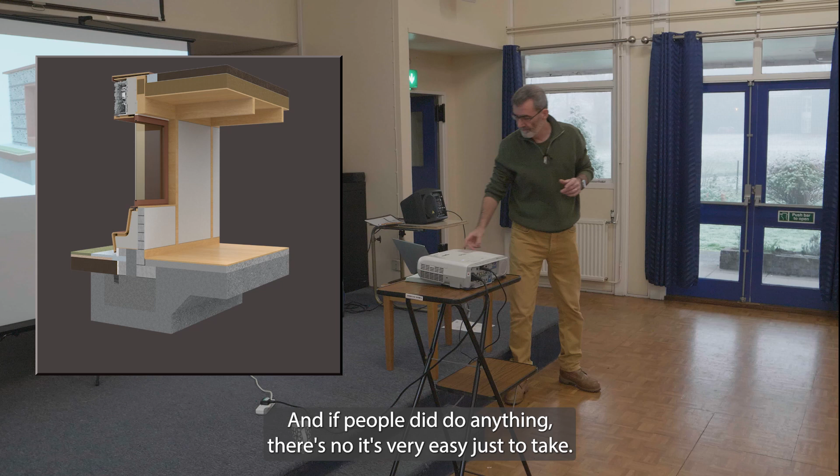And if people did do anything, it's very easy, you can take some of the rocks out and just put some more rocks in. It's quite straightforward. That's an example of the kinds of things you can get.

And copper is a good material. Most of the copper in the building industry that we use is actually recycled, 100% recycled. So it's making use of what we already have, and it lasts an awful long time. There are many different colors we can do in copper, so there's variety.

Then lastly, just on the roof, we're putting a piece of concrete, which is the floor, onto a piece of nice land. And what we're trying to do is say, well, does that mean we have to take away flora and fauna? No, we don't. We'll lift up the park and just put it on the roof, and we'll put a green roof on there so that we increase the flora and fauna of the site as part of the park.

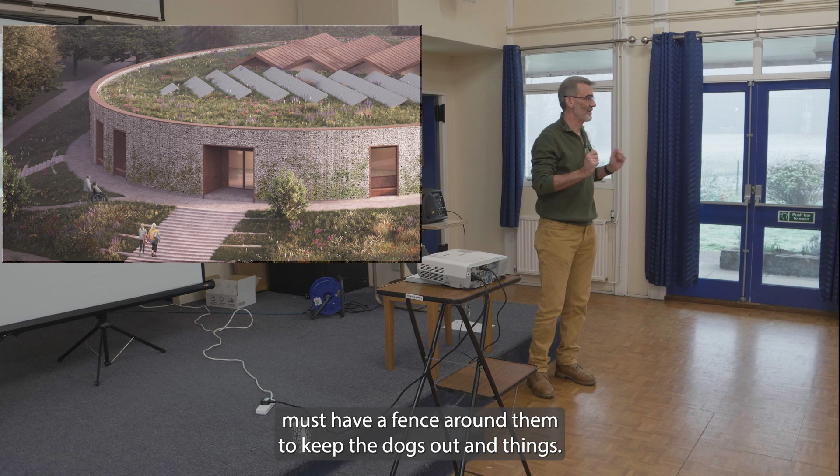So you can see that the open parts of the building want to be related to where there's connection with the park. So obviously we've got the children's park there. Parents can sit, have a coffee, look at their kids. Everything's quite safe. I have been advised, though, that playgrounds officially must have a fence around them to keep the dogs out and things, so we'll have to work with that.

And that's the entrance side there. So you can see the ramp coming down from just that point there, gently coming up to the front of the door. As I say, that position where those people are walking up the stairs is this way, and I don't see that many people using it, but it is part of the entrance, sort of arrival.